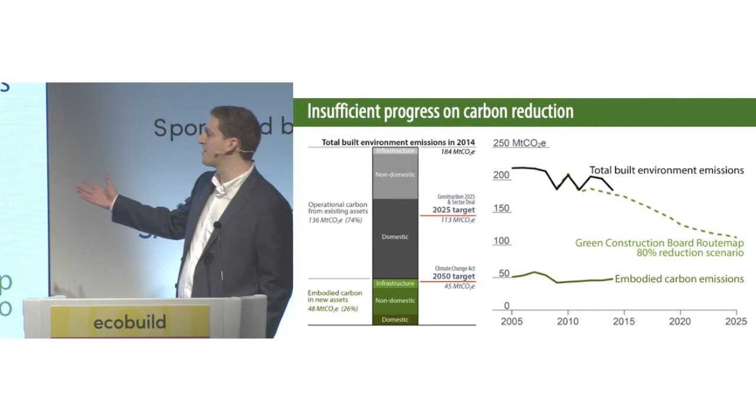About a quarter of our emissions are from building new assets. So if you think about the use of materials, fuels on site, and so forth, what we call the embodied carbon there, that green chunk constitutes about 50 megatons, or 50 million tons of CO2, every year. Now, if we think about how that's progressed over time, the only time we've really reduced those embodied emissions in the last decade has been during the recession, and that was simply because we stopped building. Every other year, those embodied emissions have increased, and as we move forward, it becomes increasingly more difficult to see how we'll meet our 2025, let alone our 2050 target, or net zero shortly thereafter, without addressing those emissions.

That means if we want to deliver more buildings—I'm not saying here that we should stop building like the recession to try and reduce our emissions. I fully accept we need more infrastructure, we desperately need more housing. But that means if we want to deliver that extra housing and still meet our carbon targets, then we need to be doing more to reduce emissions in our supply chains. And that means assessing project emissions on a whole life basis, moving away from just operational emissions, and looking for mitigation options in design, materials, and changing delivery models as well. And that means the more that we build, the lower carbon it has to be.

So say we want to build 300,000 homes a year. Just to put that in context, building 300,000 homes in just one year, the carbon footprint of that would be equivalent to all the plastic bottles we'll consume in the UK over the next 50 years. And yet, whilst this year we've seen a number of new measures to address our plastic consumption, we don't really have any policies addressing our resource use and emissions associated with that in the built environment.

That's the kind of scale of challenge that we've got. We don't even really have a very good understanding of how our resource use is distributed across that built environment. We know that to meet the UK's demands for goods and services, it takes about 1 billion tons of raw materials every year, and we know construction's the biggest user of those materials.

We've got some rough sector-level estimates of how much we use of different types of materials, and some of the trade associations have more detailed information scattered across. But the last time this data was all brought together to give a really comprehensive picture of resource use in our industry was in 1998. Now, in the meantime, we've had 20 years of conferences like this where we'll have presentations about the importance of resource efficiency in the circular economy, and we haven't gone back to revise those 1998 estimates.

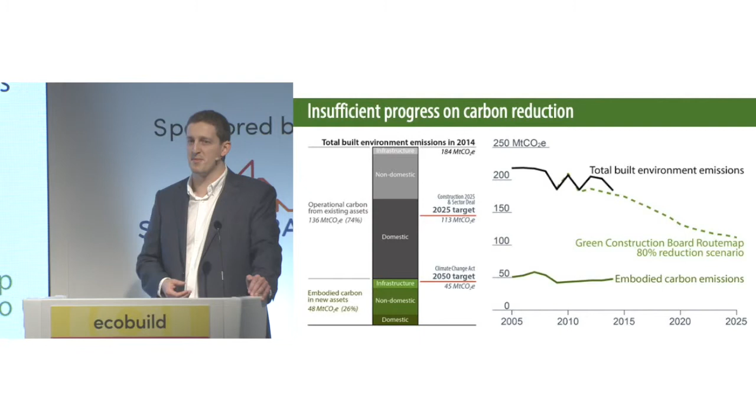Someone said before they wanted one recommendation for government. I'd argue that piece of work should be commissioned tomorrow—a fully comprehensive assessment of where resource use in construction goes—and that would inform some of the upcoming pieces like the waste and resources strategy that's coming out later this year. So the sector's a little bit behind on our targets, but as we've heard, there has been a bit of an attitudinal shift in recent years.

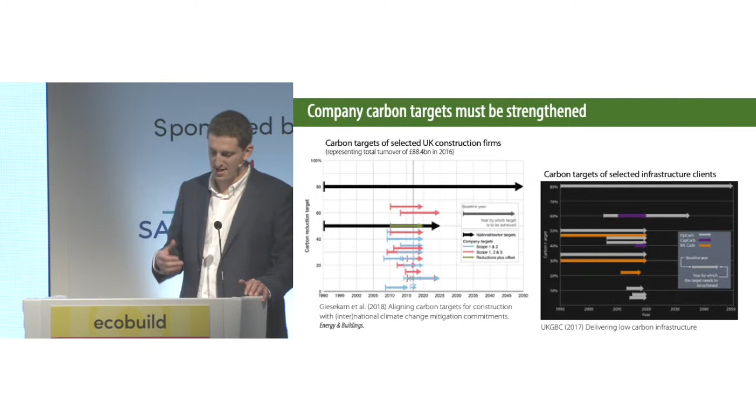Have we committed to catch up? Well, here's some of the carbon targets that companies are setting. On the left there, you can see from a review we did last year of a number of large house builders and contractors, the types of targets that they're setting, and on the right, targets from a number of large infrastructure clients.

Now, you'll notice a couple of things with this. Firstly, most of them are less ambitious than the national targets that we've set ourselves. They're typically much more short-term in time frame, which is understandable. And also, there's this lovely cliff edge in 2020, which begs the question: does that mean over the next 18 months, most of these companies are going to be revising their carbon targets? If so, now is the perfect time for us to collectively commit to be more ambitious with the targets that we're setting ourselves.

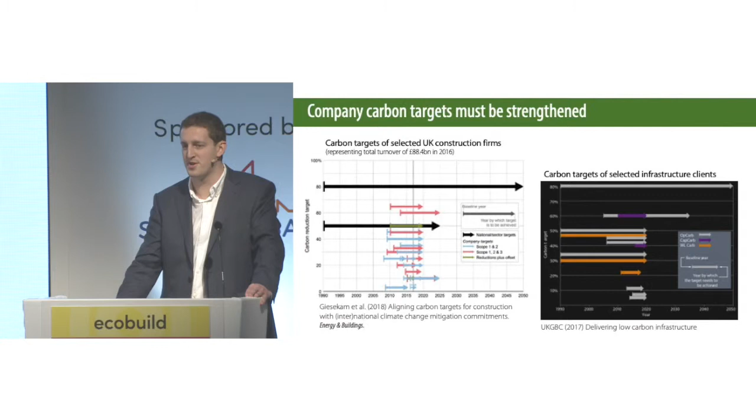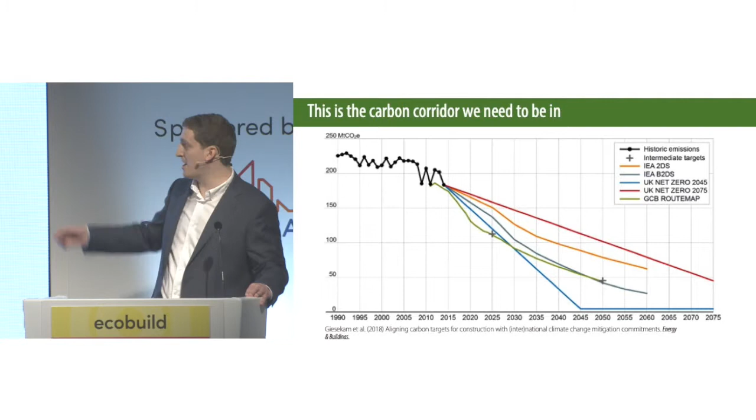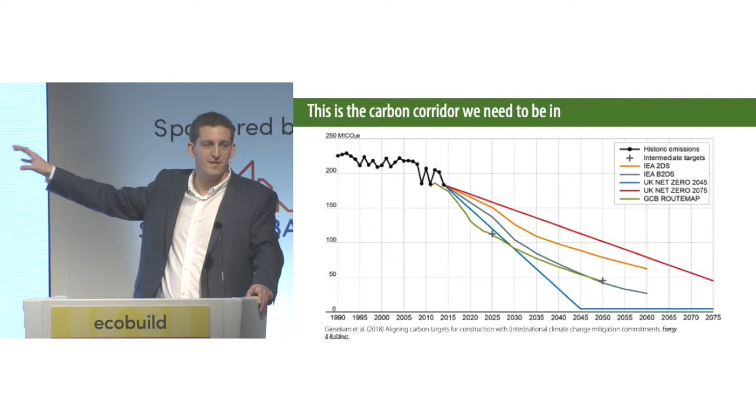And how ambitious, you might ask, if you're sitting there thinking, well, I'm probably in one of those companies. Well, this is the kind of trajectory that we need to be on. Over the last 2 years, we've seen a number of UK firms sign up to so-called science-based targets, generally aligning themselves with this orange trajectory, the International Energy Agency's 2 degrees scenario. Whether you want to be a little more or less ambitious, maybe align yourself with the route map or one of these other trajectories, that's fine. But what we need to all be is somewhere in this rough corridor.

So I'd like you to think about the current project you're working on for a moment and where it fits on that timeline. Could you please stick your hand up if you expect the project you're working on at the moment to still be here in 2055? Somebody's still living in it, someone's still working it. Yeah? Quite a lot of people. Now, how many of you think that project is ready to operate in a net zero emissions nation? Could you stick your hands up? 2, 3? Okay, that's good.

Now, the gap in those graphs and the gap between those two sets of hands, that's the gap we need to close. That's the difference between our ambitions and our actions at the moment.

Now, I think we've seen quite a positive change of tone from the government in the last 12 months with the clean growth strategy, the industrial strategy, the 25-year environment plan. But the week after that environment plan was launched with an ambition to phase out avoidable waste, WRAP lost a sixth of its workforce due to funding cuts. Now, ambitions without action won't get us very far.

Now, realistically, with Brexit set to dominate our politics and the civil service's headspace for the next couple of years, I don't think we can wait on regulation to push this forward. I think we as an industry have to step up, take responsibility, and get on with delivering this low-carbon agenda.

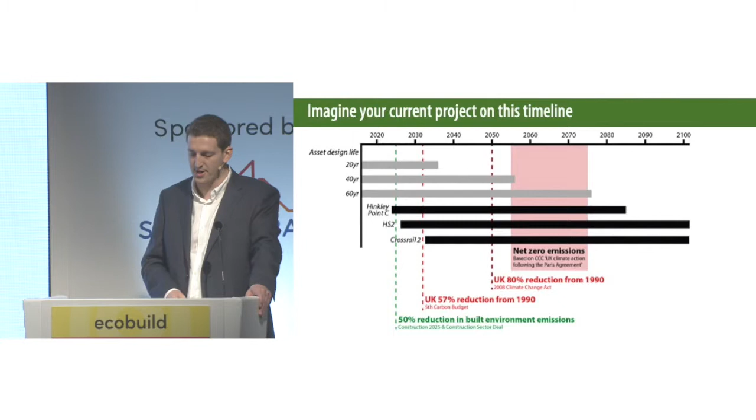So today, I'd like to finish by asking that if you haven't started assessing whole life emissions on your projects, start doing that now. I can point you to all the guidance you'll need to do it. If you're set to renew your company's carbon targets in the next 2 years, be ambitious. Think about that sort of trajectory that you want to be on.

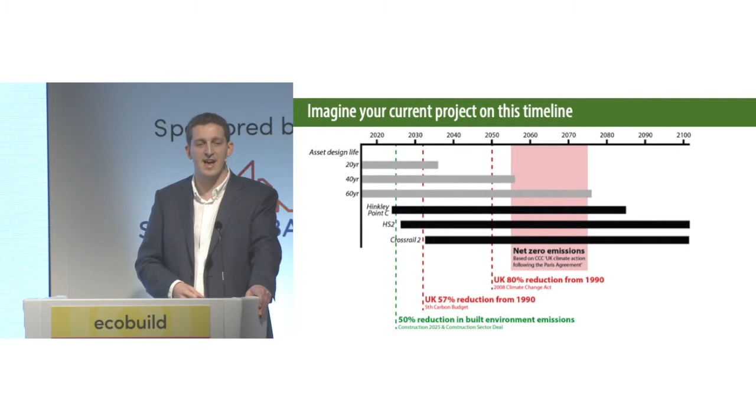And then hopefully in 5 years' time, we'll all be sat here again, and I'll be talking about how we're ahead of our targets and showing you a nice friendly graph. Cheers.

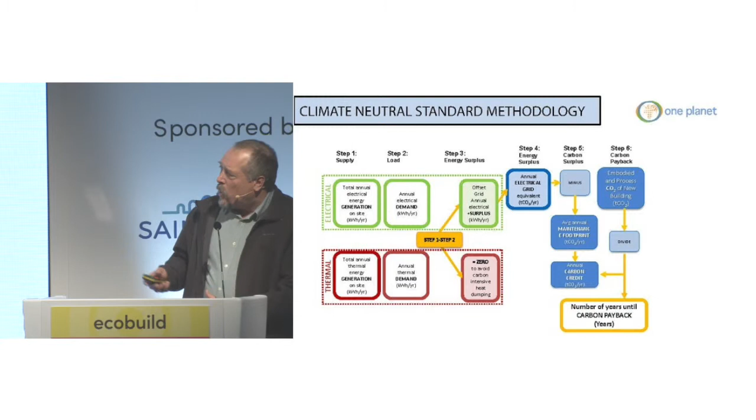The question in the UK is, how do you get an affordable supply chain? How do you reduce the cost so that these integrated products that work together to give you this zero carbon, zero waste, circular economy construction industry are actually affordable to use in development projects? But also they have to work as a whole life costing, and we can't allow the checklist mentality to stop us actually building.

So we came up with a very simple methodology which does whole life carbon footprinting and tries to show that actually you can have one number, the number of years it takes till you can pay back the embodied carbon on your new construction project or infrastructure project, taking into account the running carbon, the maintenance carbon, and so on. And because we can now invent buildings which are energy positive, you can displace power from the national grid and use that to create carbon credits that enable you to pay back the original.

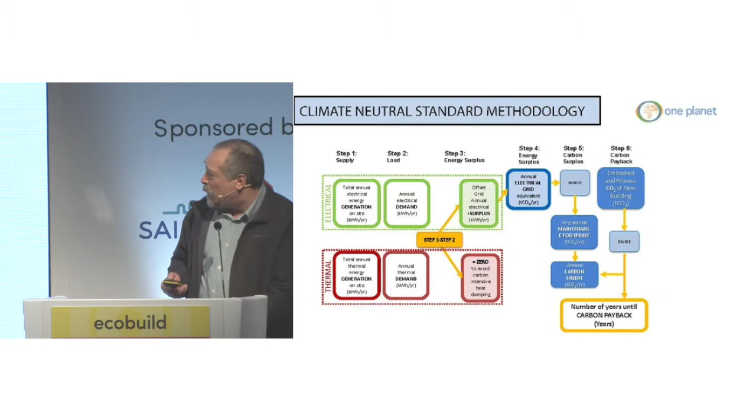So this gives you one figure, which is hopefully 42, as in The Hitchhiker's Guide to the Galaxy, the meaning of life. We've got projects we're doing now where the carbon payback is around about 25 years. And the sort of projects are looking like this.

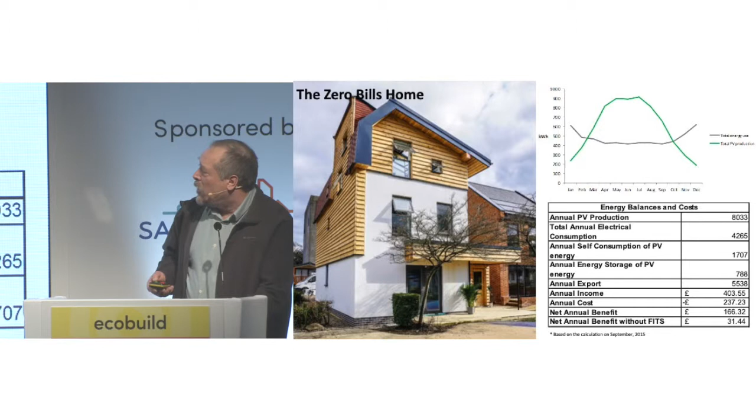This is a zero fossil energy home, net annual zero energy bills. And the reason why this works is because the cost of building a BIPV roof, which generates 8 megawatt hours a year, has come down to the point where it's not much more expensive than conventional roofing. And the cost of storing the electricity means you don't have to worry about governments and feed-in tariffs any longer. But if your house only uses 4 megawatt hours a year, that leaves you 4 megawatt hours surplus to then put into electric vehicles, transportation, and that starts to reduce urban air pollution.

So it's this joined-up thinking, this carbon philosophy, which I don't see happening very much in the UK. It's a checklist mentality, but there isn't a recognition by government, or indeed anybody really, particularly developers, that it's the interaction between all the components that gives you all these quick wins.

So we've given up. We don't mind anymore about government policies. We can take the city off-grid room by room. We can develop cladding systems now which are not much more expensive than any other rain screen insulated cladding system. We can take existing buildings and make them into zero carbon buildings. We can give them rooftop atrium spaces. We can use e-bike batteries to power rooms.

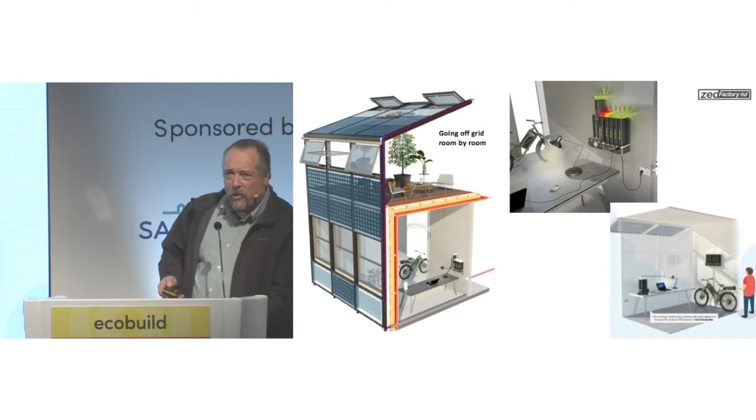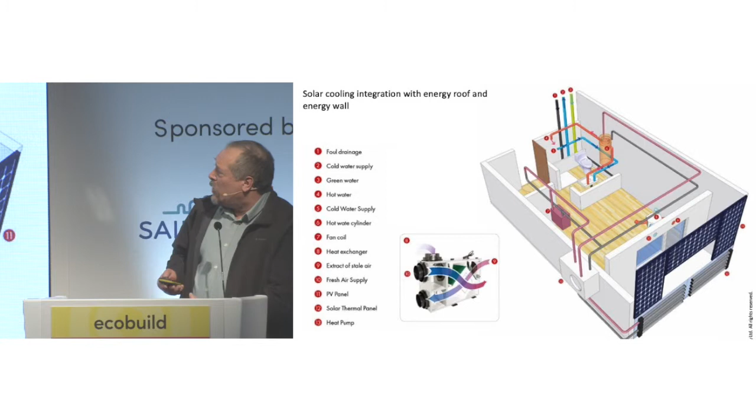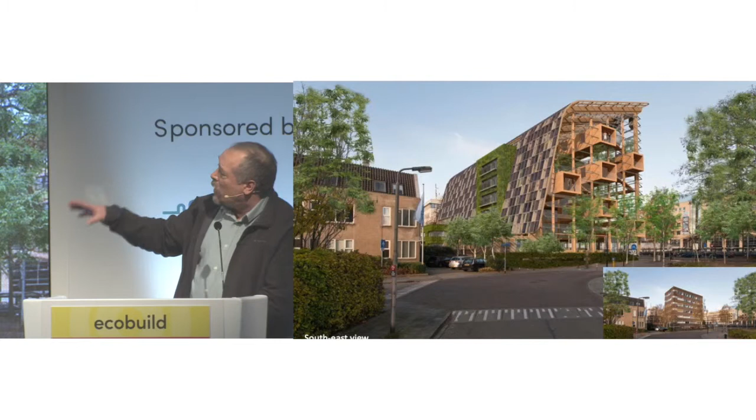This is a different future. We can use BIPV and solar cooling technologies to remove the need for district heating or CHPs. We can use these same components for the new build program to retrofit existing buildings. So if you can imagine how many buildings in the UK look like this today, and how could they be transformed? This is a live project in Holland. Why is this not commonplace in the UK?

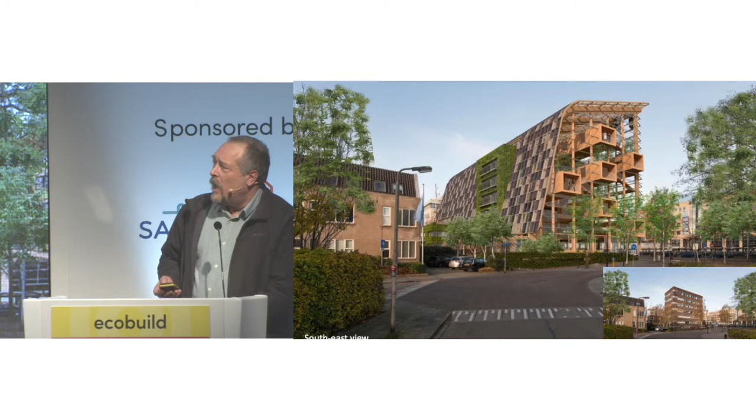Because there is absolutely zero demand. Because there's a whole industry peddling rumours that it's not commercially viable, it's not sensible, and the targets are unrealistic. So the volume house builders lobbied the government to end the Code for Sustainable Homes. We had the highest targets in the world. If we kept to them, we would have the highest standards for our supply chain. We would be net exporters, and the whole construction industry would be transformed. Instead, other countries are using these ideas, and they're accelerating, they're getting the global markets, and they're getting our industrial production. And they deserve it, because they have vision, we don't.

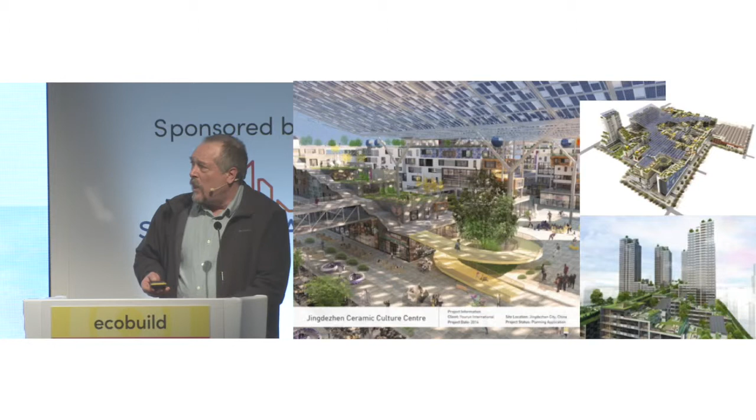Ecobuild used to be the entire footprint of ExCeL. It's now only in three quarters of one hall. Thank you.